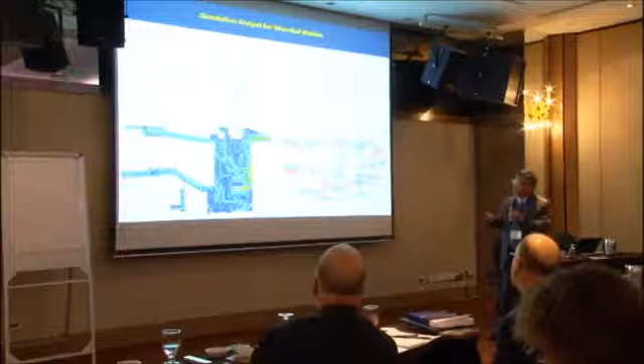And of course, these are some of our simulations for some of the stations in Hong Kong. This actually is a several-story station in Hong Kong. Basically, we simulate how people move around and the density situation. And in fact, we can add different colors for different types of individuals or passengers in the simulation.

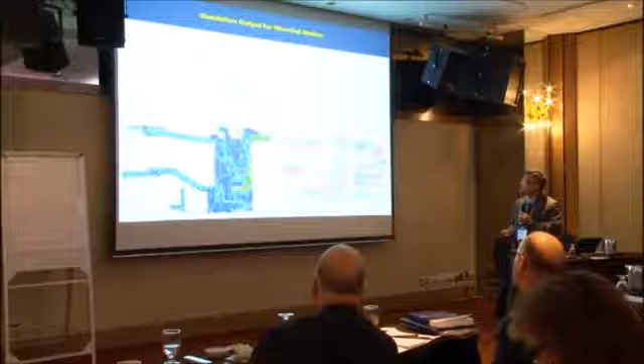Well, basically, the model is a 2D model, but for some gimmick, maybe, we also established a 3D animation for the output. Basically, people walking on the ground is a 2D situation, so only 2D is already sufficient to provide all the key results. 3D is just for some manager or top management to have a look.

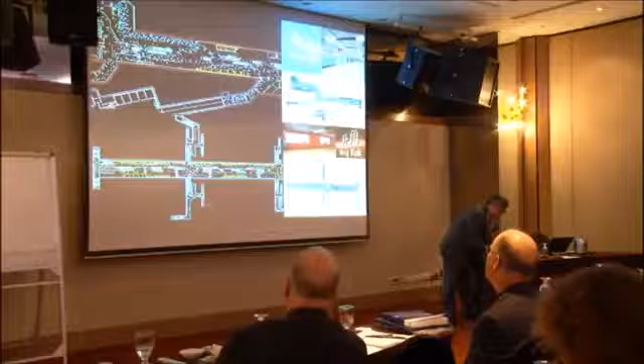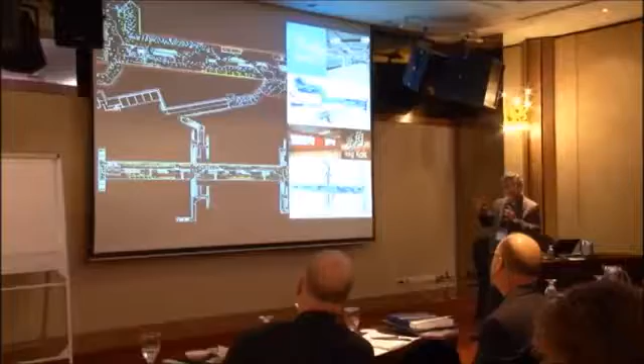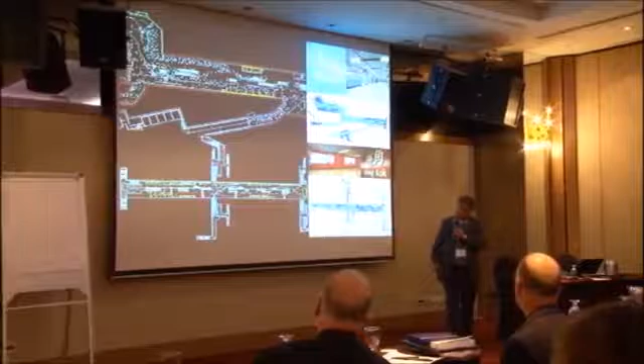These are also some other stations we just show part of, because the whole simulation model is very complex, so we just show part of the simulation. These two stations are a very large volume pedestrian flow station in Hong Kong, an exchange station with two rail systems.

To simplify the situation, we show a very simple scenario with some people and how they go to the service counter, go through the gate, get a ticket at the machine, and wait. All of this can be simulated in our model.

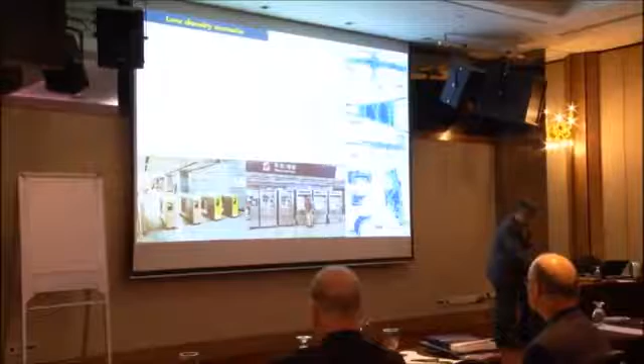From the model, we extract the key information for each part. We identify the key points where we want information and extract it from the model. Then we can see whether the capacity for each facility is all right or needs some consideration.

Apart from the normal situation, we simulate people in the normal daily situation, but we also simulate how people evacuate in case of emergency.